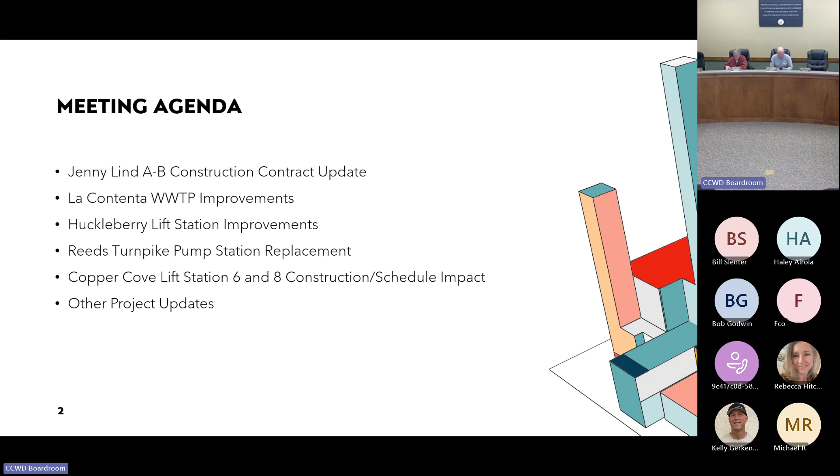So that's our meeting agenda, same thing that we got in the meeting minutes. So I'll give you a little overview of the project. This is the Jenny Lind A to B transmission main.

It's 20,000 feet of ductile iron pipe, with 12-inch to 14-inch pipe, and 5 pressure reducing stations. There's also an additive item for 210 service line replacements. This line is going to control the pressure fluctuations in the existing distribution system and keep up with the demand in tank B.

So it's along Heinemann, Hart Vickson, Baldwinn, Usher, and Wind River Drive. The work includes grinding and asphalt overlay on half the road width. So the side where we're putting the transmission main in will get repaved and overlaid as part of the requirements of the county.

Is it Heinemann? Hart Vickson? Yeah, Hart Vickson and Baldwinn, yeah. I live on Heinemann, I was like, wait a second. Yeah, don't worry.

So then the project includes a rock clause. The rock clause is different than what we did on one other job, the Techite pipeline replacement up in Big Trees. This is a rock clause where the district pays for the contractor to break unrippable rock. So if they get to a rock location where they can't rip it with a large excavator, they request T&M for breaking the rock. I just want to bring that to your attention. There's currently $50,000 in that allowance item, which gives about 4 days of rock breaking. So there's potential that we could have a change order to cover the rest of that cost.

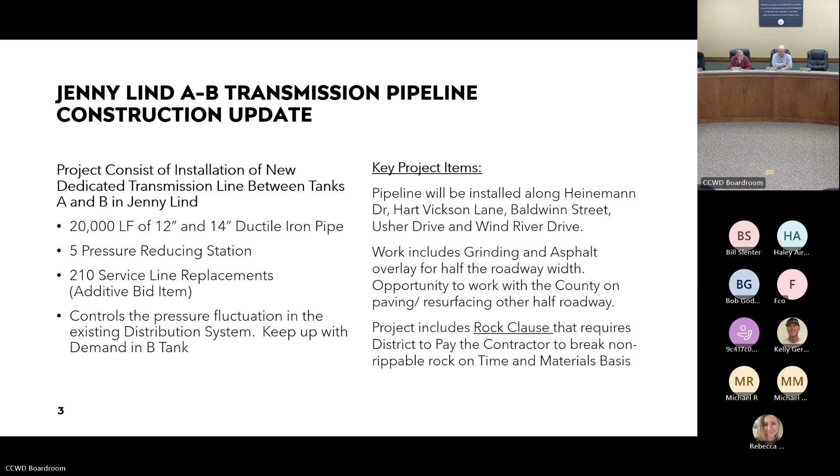So Kevin, I've got a question about the nuts and bolts of this work. You're taking out smaller pipes and putting in a larger pipe? No, the existing pipe stays. Yeah, so the service lines, if we choose to do that, those will connect onto the old pipe. The new pipe is a transmission pipeline.

There'll be PRV stations along it, so there's no customers on this transmission pipeline. This is going to be a dedicated transmission line. The current line has all the laterals from the houses and also fills them. So there's no removal, except for some small areas.

So this proposal to replace the laterals, they could conceivably stay in place without being replaced. But when you hook those up, would it be reattached to the original pipeline? Yeah, I've got a slide on that. If we want to wait for that, I can explain in more detail. Keep going.

So the criteria for selecting the bidder is based on the base bid. The person with the lowest base bid would be the one that we could award it to. So DA Woods has the lowest base bid, and when you add everything together, they also have the lowest overall bid.

There's a few bidders that had typos between their base bids, and when you add them together, the price differs. So for each line item you multiply the units by the dollar amounts, and that gives you subtotals. That's the criteria we use when there are disputes in the overall quantity - that price. But once again, it's based on the lowest base bid as the criteria written in the bid documents.

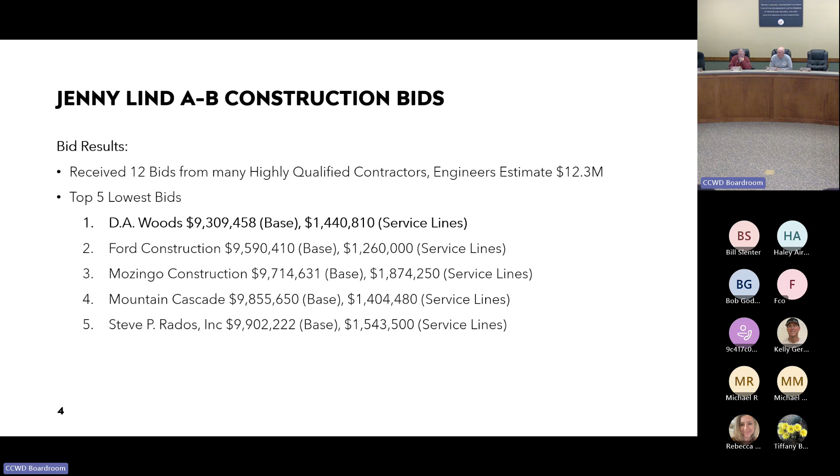So we're not - this isn't a grant funded project or anything - so we're not necessarily bound to pick the lowest bidder, but we might face a challenge, or how does it work? We are, unless we were to reject all bids, because this is the process we established for this project. To accept any of these bids, we would have to select the lowest bidder. And if we were to reject all bids, we could do a different process.

Several of them, right? You know, they're all pretty dang close. Yeah, no, I think we're really pleased with the results of this bid.

So we wanted to have a little bit of discussion about the service line item and see what the recommendations are. So the existing services are one service going to two boxes, so there's one service line, and the new project will be connecting onto the old AC pipeline in the road. So you'd put one service in the existing location and one next to it, then run two separate lines out to the services. That's a total of 210 service lines, and when you do the math, it comes up to a little over $7,000 per service line.

So the paving requirements of the county say if the service lines are further than 150 feet apart, you just have to patch the service lines. The work included in this item would be patch paving, so we'd have one side of the road fully paved with new overlay and the other side patch paved.

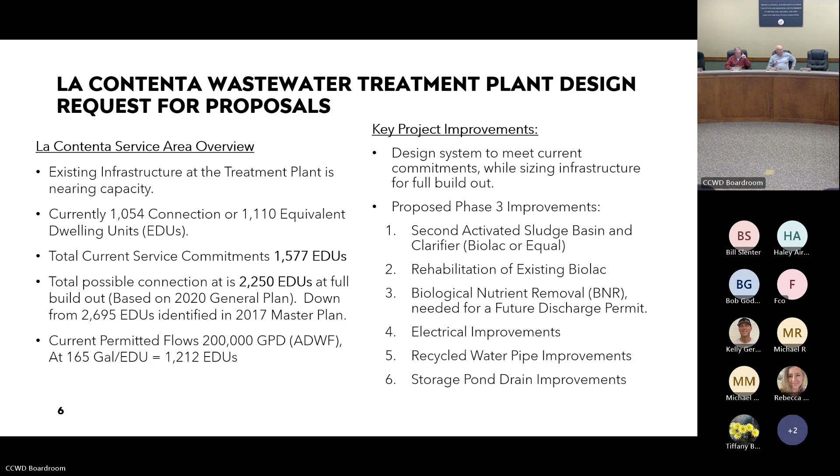So we have an RFP ready to go out for this project. We just want to get some concurrence from the engineering committee on this, and then obviously the proposal for the design consultant would come to the full board for approval.

One of the big problems is there's not adequate funding in the 5-year CIP to build this project. The funding for this portion of the project would come from the developers, but it's tough to tell when those developments are actually going to be paying their capacity fees. And the capacity fees wouldn't be enough to cover the cost of the project.

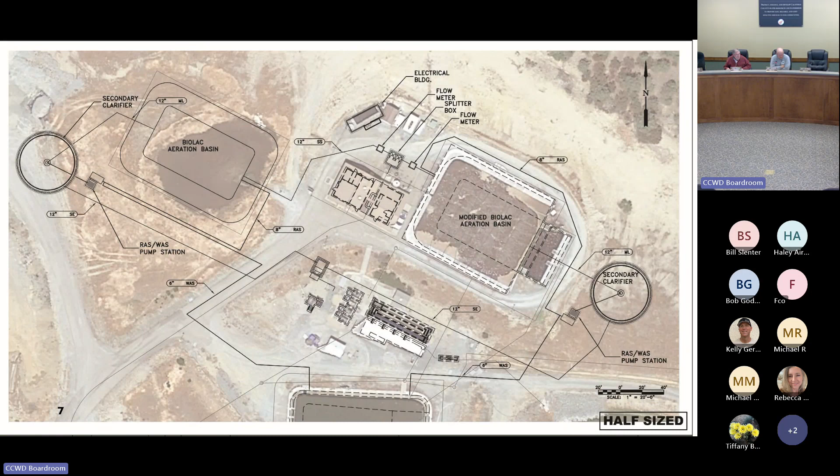I was thinking, okay, so I kind of want to get your opinion on putting this out. We talked about this, yes, my opinion is yes. Awesome. I've got some questions on this.

I know that we've got EDUs based on the 2020 general plan that reduces it from 2695 down to 2250. Since general plans are documents that can be revised and periodically rezoned, I'm just wondering about the defensible wisdom of having all these design machinations specifically targeting the 2250. Shouldn't there be some fudge factor in that?

Especially since, with this RFP, you've already identified the fact that we don't have money to build this thing. This is just asking for some money to start the RFP. So realistically, we couldn't entertain throwing any money at constructing this thing for 5 years. There's some money in there, at the very end of our 5-year plan right now, but it's not enough, it's a third of what you would need for this project.

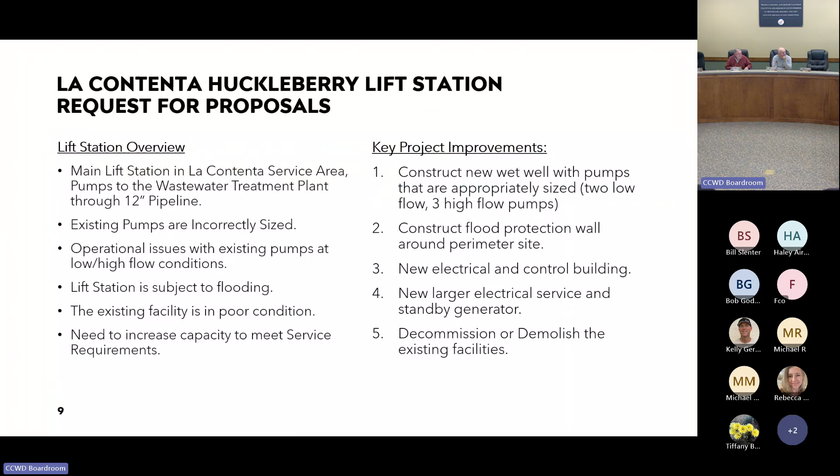I had another slide in here, but so yeah, we wanted to issue this RFP for the design services of this new facility. It's much needed.

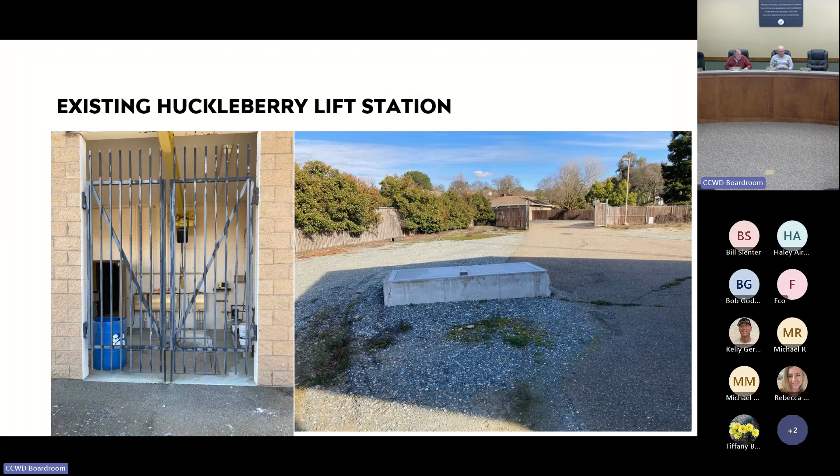I'm assuming the topography of that lot slopes from the street back toward Cosgrove Creek. Is that right? Yeah, so if the wall was being put around there, we'd adjust the level of the wall appropriately, so it'd be a tapered wall as the grade changes. So the wall would not have to be any higher than the level of the street in front? The top, I don't know, it might be a little bit higher, but otherwise it would flow in the front side.

Was there not an opportunity to add a project like this wall in the disaster declaration from a few years ago? Damon brought this up to FEMA, I guess, in this location when he did a walk with them, and they don't typically fund these kinds of projects. It was actually the Army Corps—we gave a tour of that site. I don't know if you also talked to FEMA about it, but we worked with the Army Corps on it and they declined.

But we would definitely reach out and see if we can find other sources. Could we do this through our hazard mitigation plan? Oh yes, I think the local hazard mitigation plan has references to Cosgrove Creek issues. Just something to keep on our radar if something comes up, to seek funding for that through the hazard mitigation fund—that's kind of what we did at Hunters.

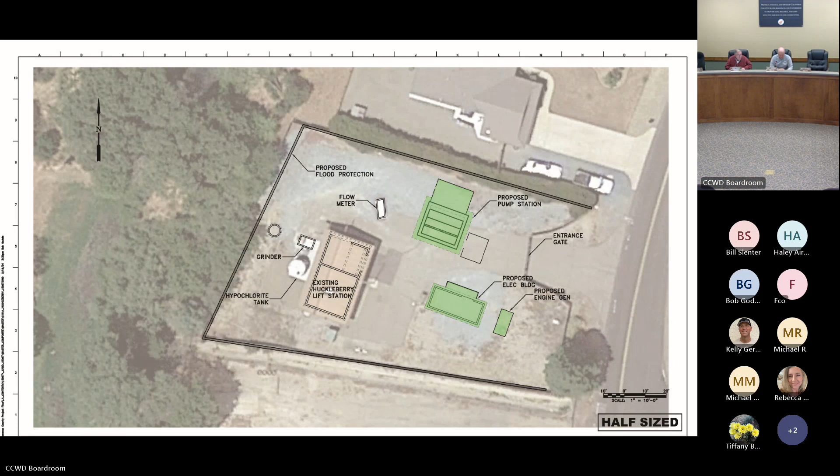Okay, moving on to the Reed's Turnpike pump station. Juan. That's fine, and I'll be presenting a quick overview of the Reed's Turnpike pump station coming up.

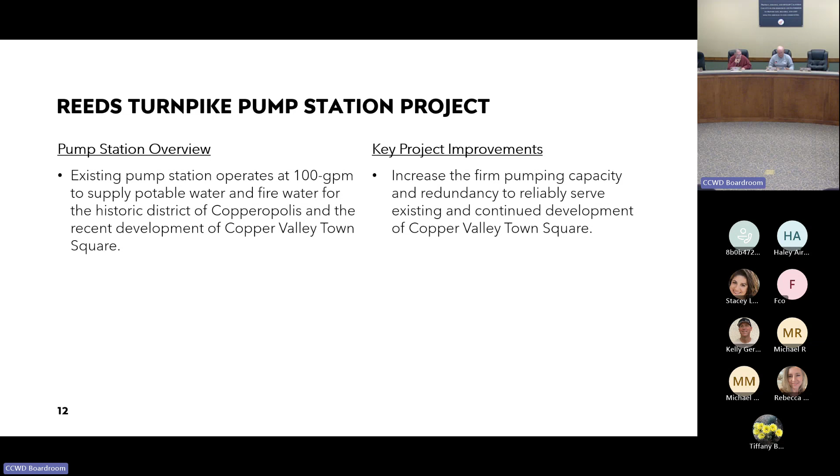So the improvements of the project will increase the pump rate to 200 gallons per minute, plus it's going to become more reliable. The existing pump station is pretty much at capacity right now, pumping 100 gallons per minute to fill up the tank at tank C in Copperopolis. The pump station is subject to cavitation, and that's one of the things we want to improve with a new pump station.

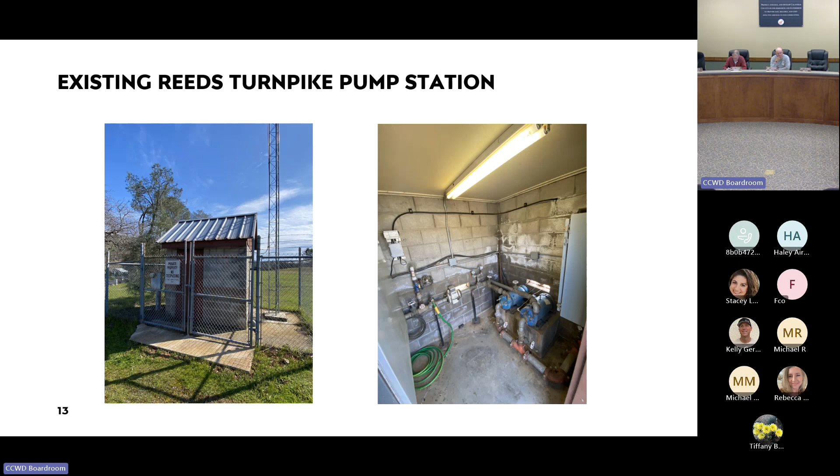We're proposing to copy a similar design. We have an existing pump station on Dennis Court in Valley Springs, and we'd like to take the same wall finish - it has this rock, pretty nice looking, and the inside is much cleaner with new technology. We'll be able to hopefully take care of some of the issues we currently have. I believe Dennis Court was paid for with OES funds from the Pattison Fire. Yeah.

The financial considerations was pretty easy. Since it's a developer-driven project, it's 100% funded by the project, and this came from resolution 2008-28. And that's pretty much it.

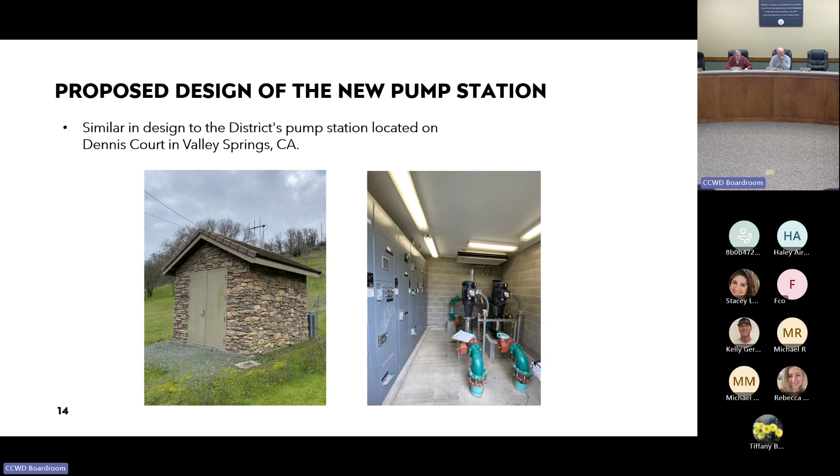Okay, it looks like the design you're leaning toward is also a concrete block building, just with stone covering on the outside. Will you be able to incorporate the existing structure into this new structure? No, we looked into that, and it seems the majority of the existing piping is going to be better off just starting all over right next to it. Start right next to it, but then the old structure would remain in place or be removed? After the new pump station is ready to go, we demolish the old one. Okay.

You could move it. Well, where do you want it? Yeah. It'd be easy to move it, but anyway. Accessory dwelling, here you go. It's not quite 300 square feet though. Prefab. Okay.

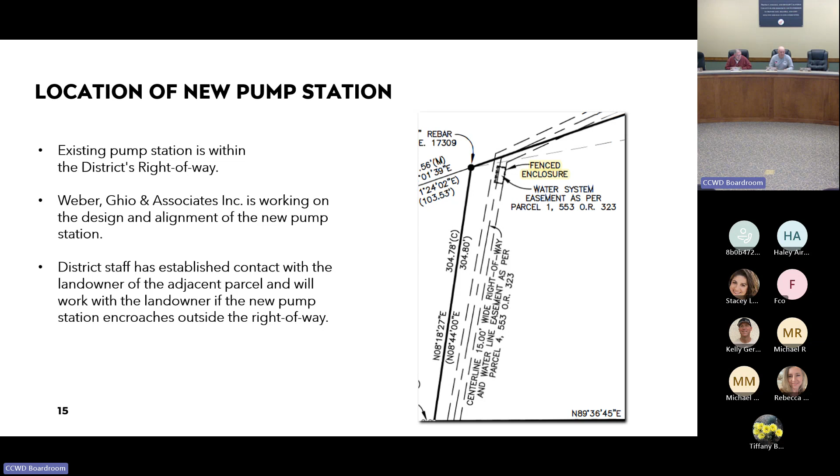And you've explained to the developers of Copper Valley that they're going to have to put up a new building and everything? They're aware of this, it's part of the development of Copper Valley. They're planning to increase it. Are they good with the rock scheme on the outside? I'm not sure exactly where this is going to be - I don't think the architecture's been fully decided on. That was just something we showed them as an option, a pump station that we like and operates well. If they want to do their own decorations, that's fine, I think.

Yeah, but we're not going to pay for an engineer to do it, but they have some ideas. I mean, it's basically a shed, so it's not that big of a deal, but it'd be good to make it at least fit in with the area there. Most of the structures in Coppertown Square have some rock on them, I just want a little time to make sure we're on the same page.

They're also plastered, and plastering over block walls would be far less expensive than covering with artificial stone. Okay, I'm telling you, it's your neck of the woods if you want.

Okay, funded by others, necessary, totally. What could be wrong with that?

But okay, any comments from our observers today? Huckleberry Lift Station? No, this is a Reed's Turnpike, excuse me. No? Just congratulations on your project there. Get it done, make it look pretty and work great. Okay, all, thank you, right, Francisco. Guaranteed.

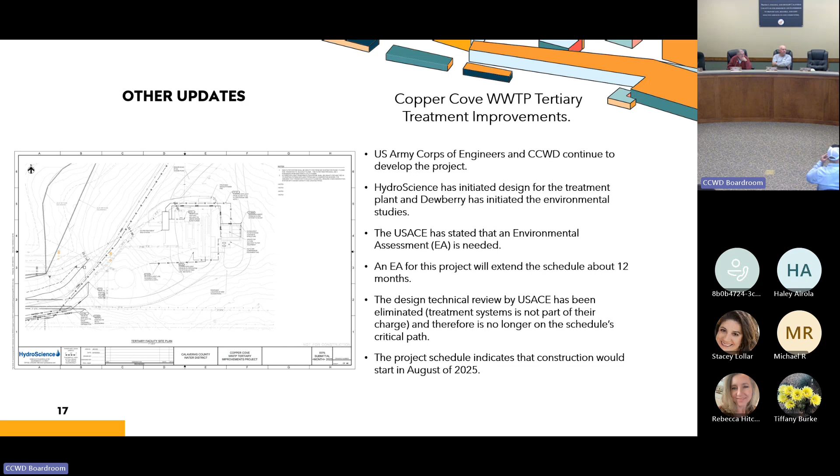Unfortunately the Corps says it needs a full environmental assessment - we can't lean on a categorical exemption for this project. We thought the Corps could adopt another federal agency's categorical exemption for similar projects, but their command has decided no, they cannot. So we're going through the EA, which means a lot more studies and whatnot.

Which then you put into the whole comment phase of the NEPA procedure, going to public comment review for 60 days, et cetera. So that pretty much pushes this schedule pretty far out. And we're looking at, you know, a year from now, perhaps bidding the project and then constructing it.

It'll take about a year after that. So right now, we propose to the Corps separating out, at least on the treatment side, getting some pre-treatment done. We would lead that project. CCWD would take the lead on that aspect of the project so that we can build something to reduce the operational risk that the treatment site currently has in terms of spillage. So we're asking the Corps to go ahead and review our proposal for us to pre-purchase the SAF, a submerged aerated filter system, and putting it on site.

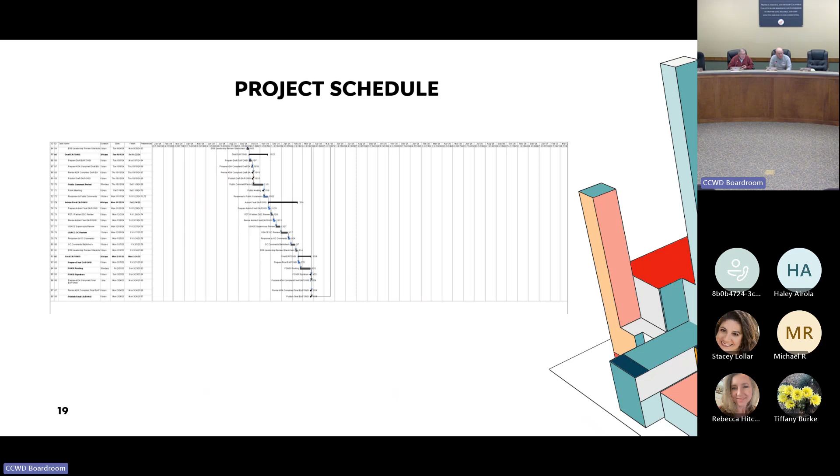Director comments or future agenda items? None, we covered a lot today. We'll cover more and address putting in the district areas these projects are in. I thought it was a pretty simple format — we could probably do both since it's just a running tab, you wouldn't have a lot of extra work. Every month we'd see the status of the projects; many times they don't change at all, but it allows us to keep track, and the public too, knowing we're managing the project per the service area. That makes logical sense for an engineer, looking at the service area and its needs rather than political boundaries, which change depending on the census — not every 10 years, but they do change.

Did you get the report about the $11.2 million — I don't call it an earmark — that survived the coordinating committee? Yes. Good, fingers crossed on that one. All we need is a budget. Exactly. Maybe Haley could work on the budget at the federal level.

Okay, any other comments of any kind? This is Kate's last engineering committee meeting — let's give her a hand. She decided to go to the HR world, but thank you for your service in this transition, and thank you for all your hard work in the past. Is that the new office over in the...?